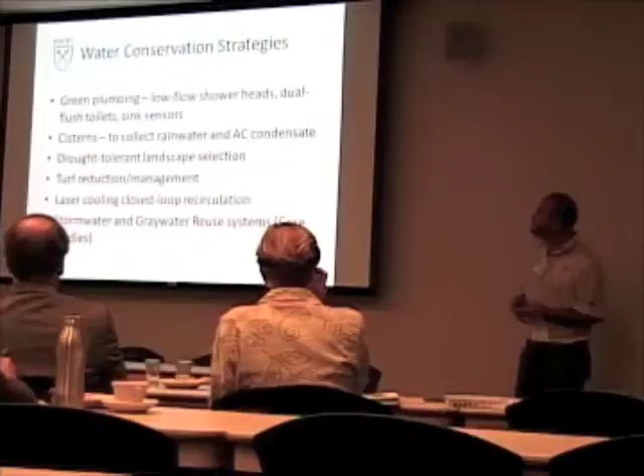So these are just some of the conservation strategies we employ - you've heard about so many of them. Green plumbing, as I like to call it, certainly part of our green buildings.

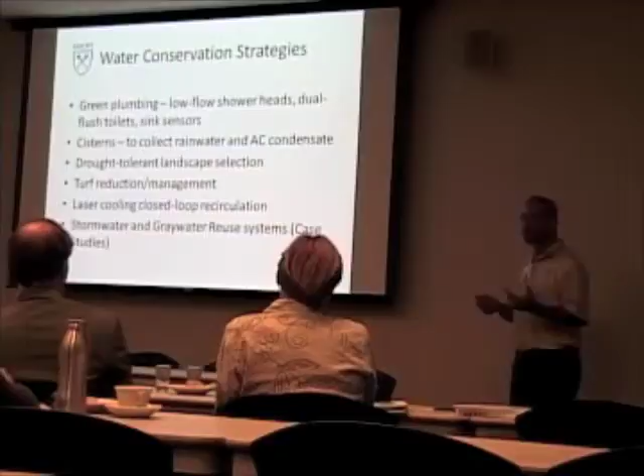At Emory, we currently have 16 LEED certified buildings, and I dare say in a week we might have 17. We've got 4 more in the works and about 3 in the planning stages. So we've definitely bought into the whole LEED concept and the green building program - that's a program I manage. I recently got my LEED professional accreditation, and I'm actually acting as the lead consultant on a new freshman residence hall project, just to try to save the university some consulting fees. So it's been a fun challenge as well.

But of course, all of the low flow fixtures, dual flush toilets, sink sensors and aerators.

With the cisterns, we're in a very similar situation as UGA. We have perhaps 9, maybe 10, traditional underground cisterns that, for various reasons, just aren't functioning at optimum ability, let's put it that way. Probably the biggest reason is during our design phase we tend to have too many cooks in the kitchen with our cisterns. A civil engineer will design the size and type of cistern, then pass it off, and it sits for a few months, then the electrical guy gets involved, then the mechanical guy, and by the time it's all said and done, our commissioning engineer at the end isn't really sure who's talking to who, and the whole system's not really fitting together. So that's been our biggest operational challenge with our cisterns, but we're trying to right that ship.

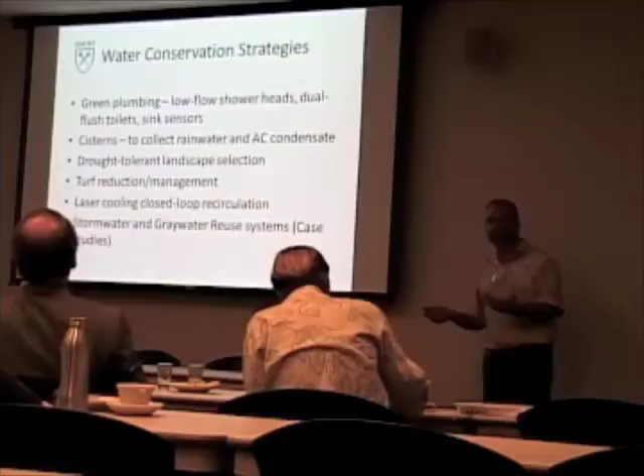Of course, all of the landscape management, turf reduction - we have a no net loss in tree canopy policy. We've established a tree bank: for every tree we take down on campus, we're required to either replace it or set money aside into a bank for future tree plantings. It doesn't necessarily have to be on the specific project, but elsewhere on campus.

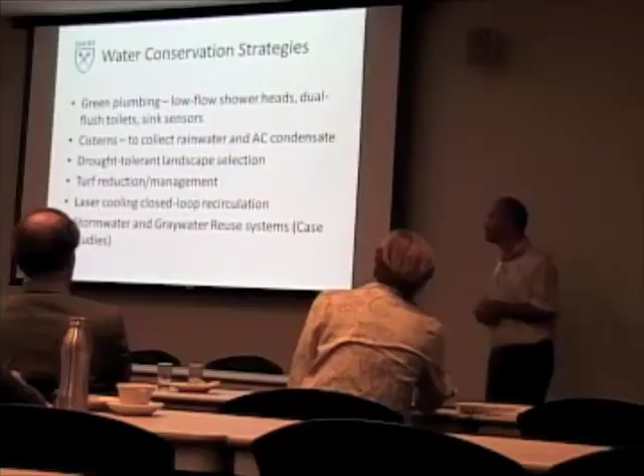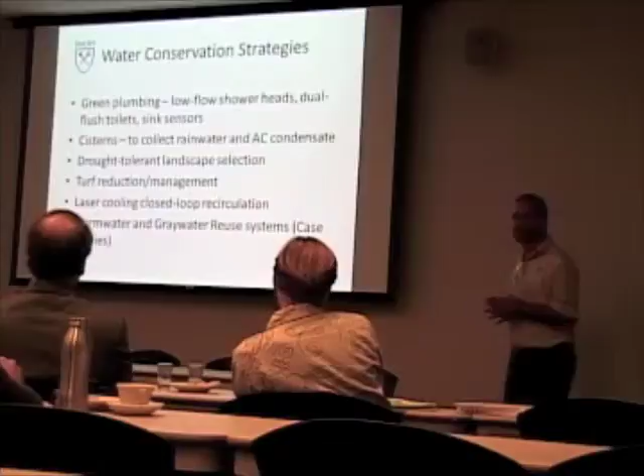Again, with laser cooling, the closed loop recirculation has saved us a lot of water. And then specifically what I'm going to talk about today are two stormwater and gray water reuse systems that we have recently incorporated into two new residence halls.

So, first of all, this is the Few and Evans Residence Hall. It was completed in 2008, 110,000 square feet, 293 beds. It is certified LEED Gold.

It is a sustainably themed residence hall, and students are actually required, during their application process, to submit an essay about what sustainability means to them, how they plan to further their commitment to sustainability, and how living in a sustainably themed dorm will affect their lives. The RAs and other student-led staff in the buildings run themed events surrounding sustainability, so we try to make it a fairly comprehensive culture for the students. The architect on this was Ayers Saint Gross.

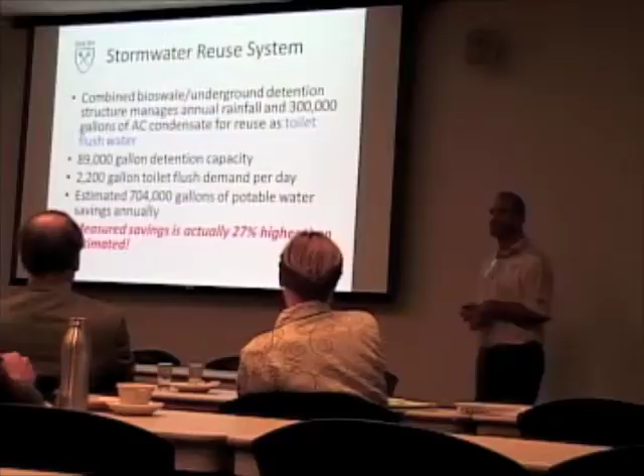So the stormwater reuse system, I'm going to describe it first, and then we'll go through some really telling photographs to help you understand it better. The system consists of a combined bioswale and underground detention structure. So basically it's like a cistern, but not a traditional cistern, meaning not a big box, not enclosed pipes.

The detention structure was designed to handle the annual rainfall amount, and it also collects about 300,000 gallons of condensate. We use the water for toilet flush. The detention capacity is 89,000 gallons, and we've calculated a 2,200 gallon demand per day. That totals up to an estimated 704,000 gallons of potable water savings per year. However, we are tracking this, and during the building's first 2 years, the average annual additional increase was 27% more than predicted, so we're very pleased about that.

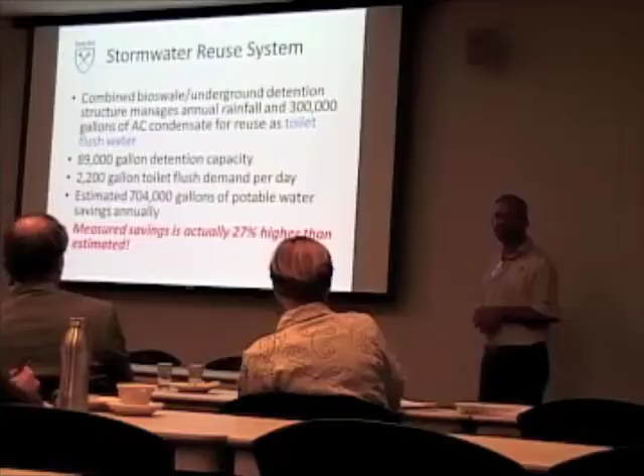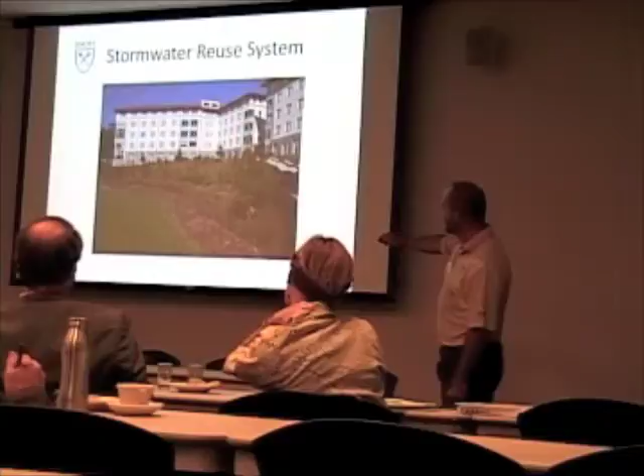So this is the system. You can see the new halls there - maybe a little difficult to see. The slope coming down from the top of the stairs, that's the bioswale right in there. The berm is the back of the bioswale, leading out onto a student athletic field.

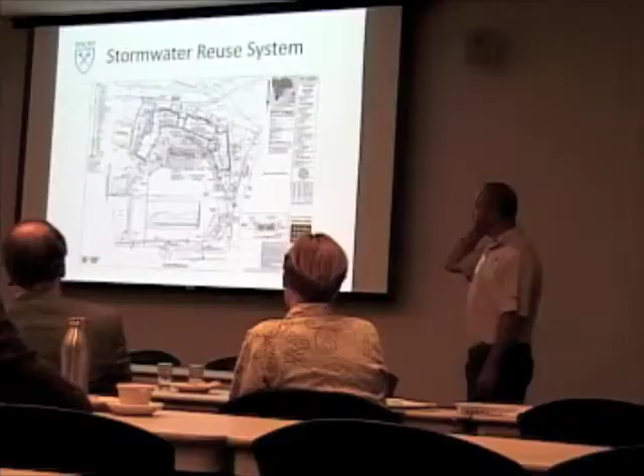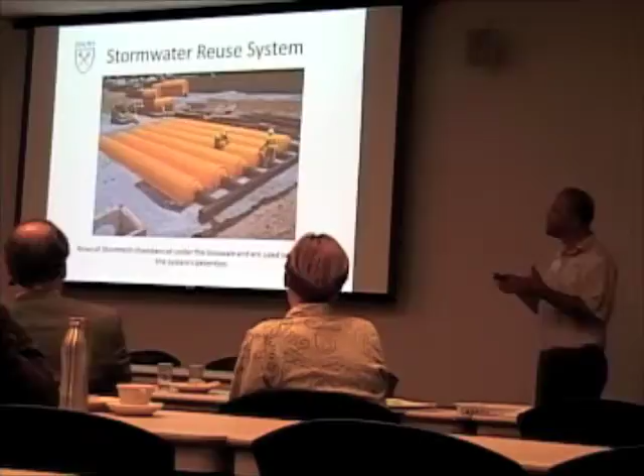These are what the storage structures look like - they're called StormTech chambers. If I go back a couple slides, those sit under the ground here, about 6 feet down underneath the surface that you see. It's a big system of chambers that sit in parallel, or manifolded together.

That's what the water flows into. It either percolates through the bioswale, through a specially engineered system of soils and plants that help filter and clean the water, or it directly runs off of the roofs and down through a direct inlet system through these manifolded pipes.

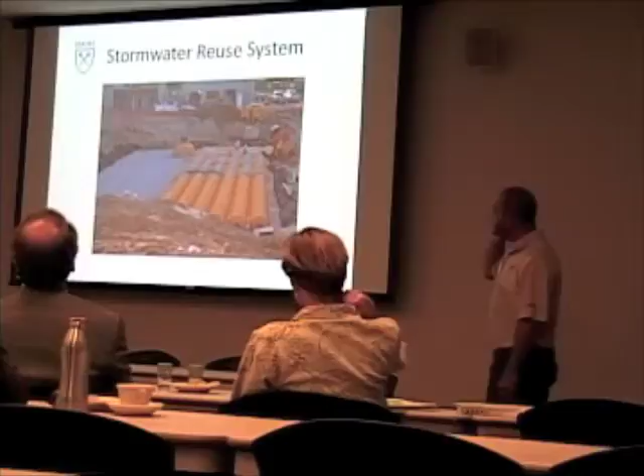Just more pictures of the install. They were set down on - you can see this black liner system, that's an MDPE, medium density polyethylene liner, on top of the gravel base, then the chambers, then more gravel on top, and then the constructed bioswale above that. You can see they're just covering them up, and that's basically what we have right now. This was taken maybe 6 months after the building was completed. Since then, the vegetation has filled in very nicely - it looks a lot better now.

That is an overflow structure that was designed for if we get any major rainfall events that would inundate the system and cause a backup situation. We don't want that, so we had to build in a system of overflows that would then take the water directly to the storm system.

Once everything is in those yellow chambers that you saw, and there is a demand in the building for toilet flush, we have a pump powered by these solar panels that moves the water from the storage chambers inside the building, where it goes through several filtration systems, and is ultimately stored in a smaller tank and then pumped up to the bathrooms within the hall.

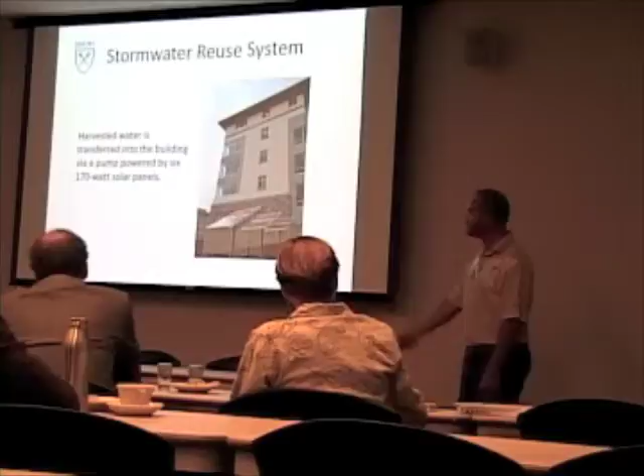Coincidentally, this to date is one of the very few solar arrays that Emory has on campus. We have not been successful with renewables, unfortunately. Emory is very fiscally conservative, I'll say, so our payback window is very, very small. While we realize there's certainly an invaluable price to education and public relations, our administration generally doesn't tend to fund anything with probably more than a 10-year payback. Generally, so far, we've found that most solar arrays do not provide that good of an ROI.

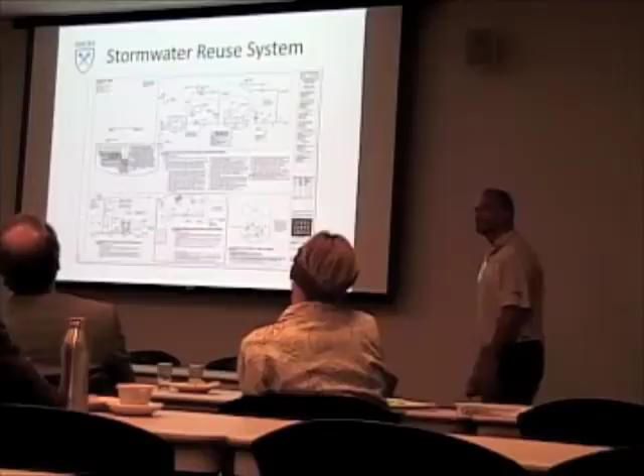So, anyway, this is way difficult to read, I understand - I just wanted to show you, this is a schematic. This came right out of the construction documents. This is the system. Basically it shows the pipe systems with the lift station there, bringing the water into the building, the filtration systems, the storage - a lot of very technical stuff that is above what we're talking about.

We've recently got funding to put them in 7 non-residential buildings as well, so we're going to be able to start having competitions among buildings and all kinds of really cool stuff that these monitors do. It sounds like we have the same system at Agnes Scott.

So it's a great educational tool.

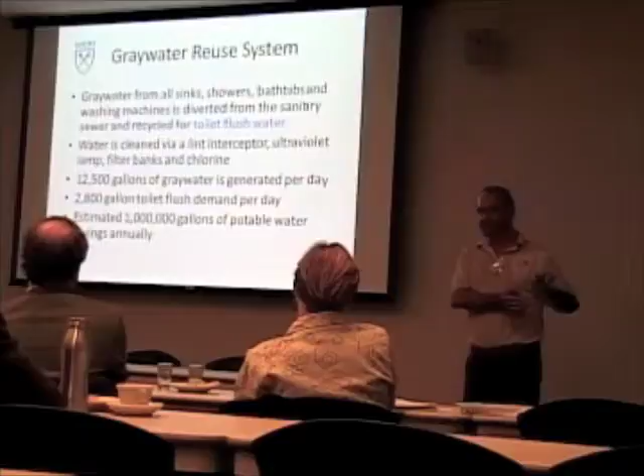For those of you who may not be familiar with gray water systems, you have your black water, which is purely sanitary sewer discharge. You've got relatively clean stormwater, and then something in between known as gray water. That's when you wash your hands after you go to the bathroom, shower water, water from washing machines, dishwashers, things like that.

In DeKalb County, where Emory is located, they were not familiar with the concept of gray water. So we had to do a lot of education with them, a lot of extra evaluation and presentation, basically, to get them to buy into allowing us to install a gray water system. But it all worked out.

I'll go through this real quick with you. As Kevin pointed out at UGA, we also had some operational issues with this, but we've pretty much gotten the bugs worked out of ours, and we feel it's working pretty well now. So would love to compare notes with other guys if that's appropriate.

Basically, all the gray water is diverted from those sources. It's taken down into the mechanical space in the basement of the building. It's put through a series of cleansing, which consists of a lint interceptor, ultraviolet lamp filtration to kill bacteria, some filter banks, and ultimately addition of chlorine. And on this system, the county required us to dye the water.

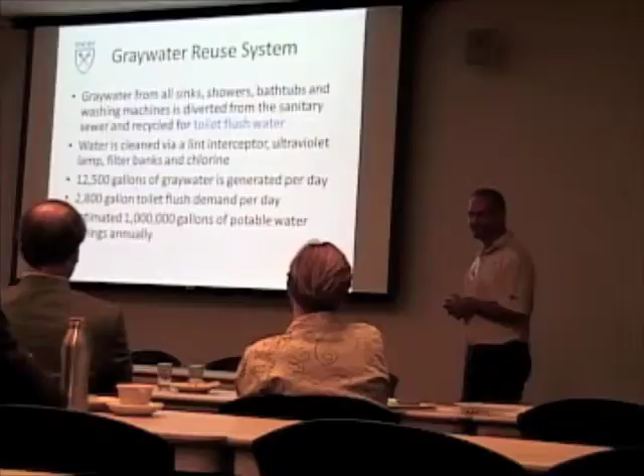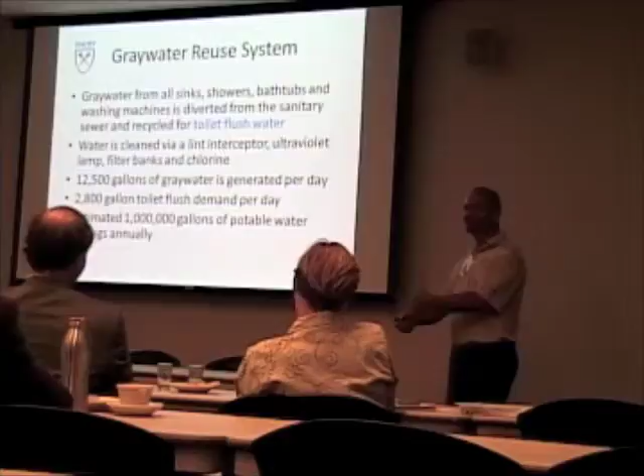Can you imagine why we would have to dye toilet water? Well, I don't know. It's just, as an engineer, counterintuitive to me. But these are students, perhaps. I don't know, not really against you guys, but I don't know who would stick their head in the toilet to get a drink. They made us dye the water to differentiate, to physically differentiate that water from the potable water. So anyway, that last step is to dye the water before it gets sent upstairs.

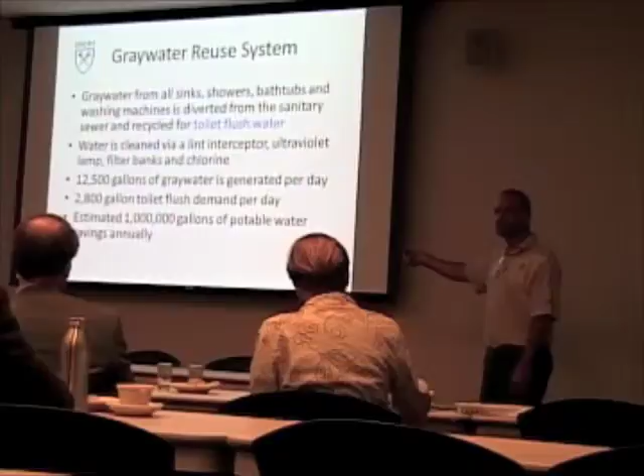We calculated roughly 12,500 gallons of gray water per day, 2,800 gallon demand via the toilets, and that's getting us roughly 1 million gallon savings of potable water. So this is not chump change. These are very good systems that were capital intensive, a lot of money up front, but the calculated payback, I'm sure is very good. And based on the stormwater reuse system in the other hall that I mentioned, we're seeing exceeded savings, so that's only going to make that payback even better.

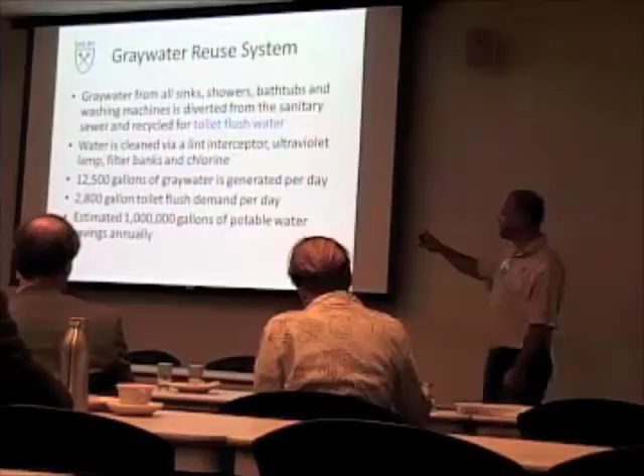This one I don't have hard performance numbers on yet, but I will in the future.

So this is what the system looks like. These are two of the holding tanks that the gray water initially flows into to start the filtering process. And then it continues through a series of things that I do not understand, but it's real pretty to look at. And believe it or not, even after a year, this mechanical space is still this clean. So shout out to you facilities guys.

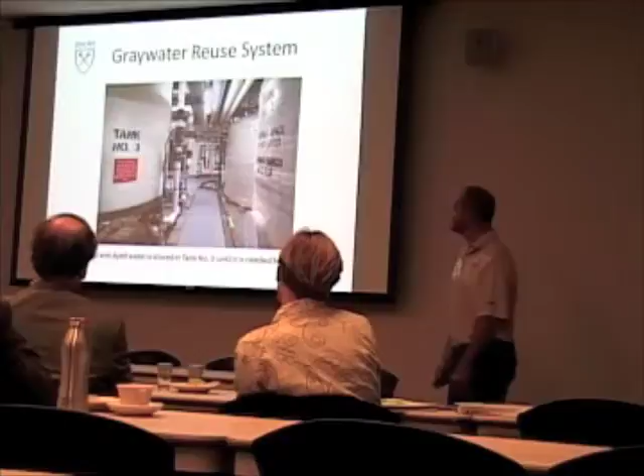So there, tank number 3, that's where the chlorine and dyed water goes. And after everything goes through the filtration, it goes into that tank where it's stored until the demand to be pumped upstairs. And there's the schematic for that one, which is even more confusing to me than the other one, but it's a pretty cool system.

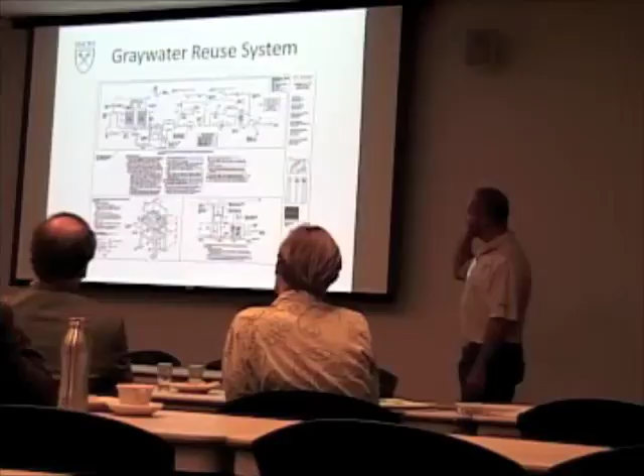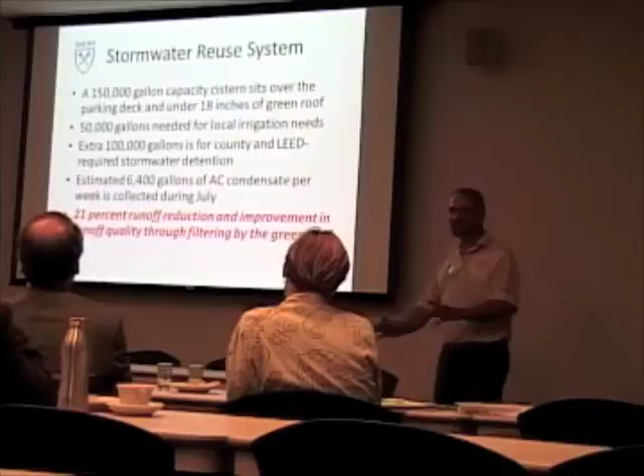So the stormwater reuse system at this site is a cistern, but as Kevin mentioned, at UGA and at Emory, most of our cisterns are underground, out of sight, out of mind. Like I said, they don't even work right, so it's like, why even talk about it? This one we like to talk about because this is an elevated cistern. It's a pretty cool concept. It sits over a parking deck and under a green roof.

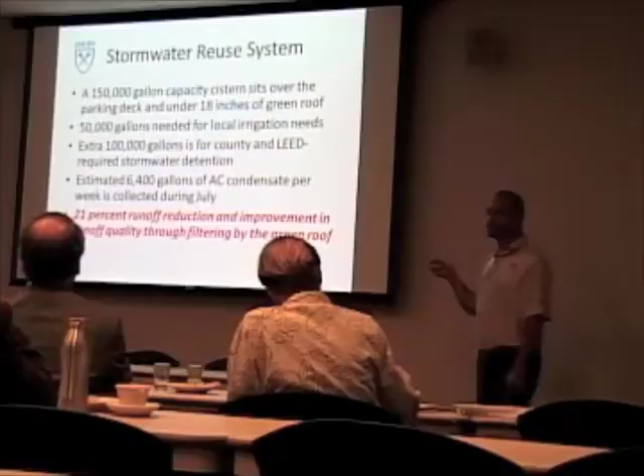So it's about a 3-foot thick system, and I'll describe it in more detail, that sits between the top of a parking deck and a green space outside of the new residence hall. We calculated roughly 50,000 gallons of water are needed for the site's local irrigation needs. We needed to provide an extra 100,000 gallons of storage capacity as per county code and for detention requirements required by LEED.

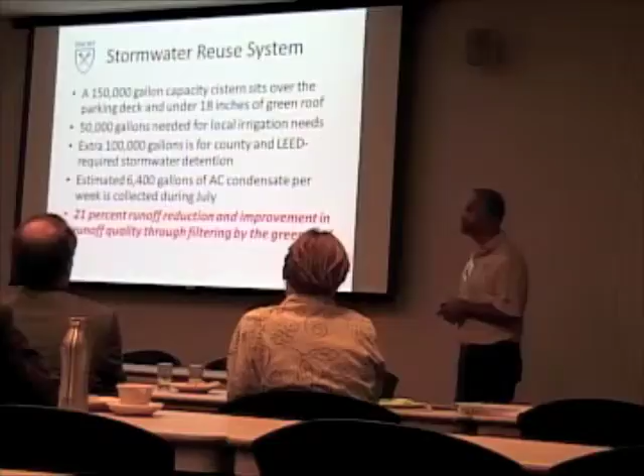And then there's also additional approximately 6,400 gallons of condensate per week going into the system during peak periods. For us, we calculated that in the month of July. So you can see, based on our calculations, we do have a 21% reduction in runoff. And because of filtration effects from the green roof, we have better water quality going into the municipal system.

What it consists of, roughly from the top going down, is about 18 inches of soil and turf on top, and then another 18 inches of the weirdest stuff - I can't even remember the technical product name, but it looks like old milk crates, a bunch of little milk crates stacked together almost like Legos. When you look at it, it has a honeycomb effect. It's this really hard plastic material that's not even as thick as a milk crate, because milk crates are pretty sturdy, you can jump on them. But this stuff has the structural integrity to support 18 inches of soil on top of it.

It's really called a rain tank - that's what it's called, a rain tank system. So it's a really fascinating product to me.

We are having some operational issues with it because it tends to clog pretty easily. The way the system was constructed, we do have filtration blankets and all that sort of stuff built in to help minimize those effects, but we haven't been able to pinpoint exactly where the stuff's coming in. So that's definitely something we're trying to work through.

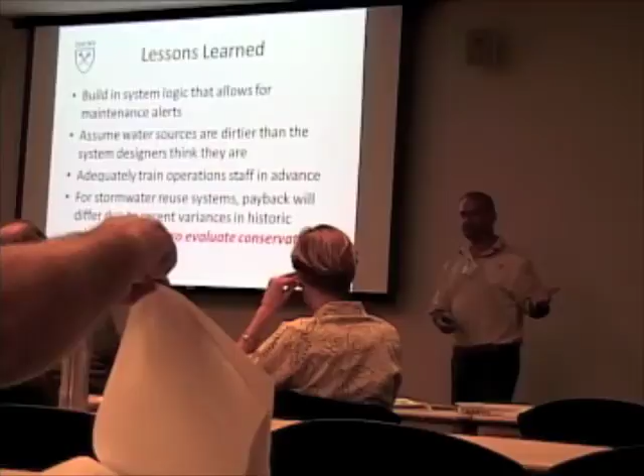Another big one we had, especially with the gray water system - assume the water is dirtier than the designers say it is. We worked with a couple different vendors in putting our system together, and they anticipated certain types of additional fluids coming down through the sinks, through the system. But our filters that they said would adequately keep up with those supposed amounts have not been able to at all. The water's been way dirtier than we were told it would be. So we had a lot of operational maintenance issues because of that.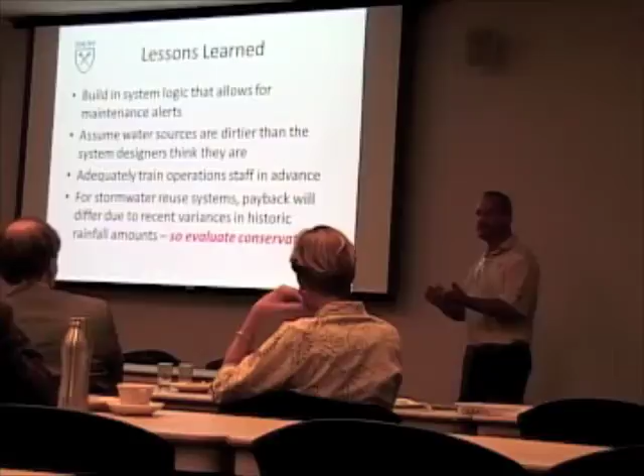These are, as someone else pointed out, very complicated systems. So always make sure to train your operations staff well in advance, and as Kevin said, get them involved during the design process. Get their buy-in so they feel ownership of it, and it's not just something being handed off to them while we in planning and construction go off to the next project. So always try to keep that in mind.

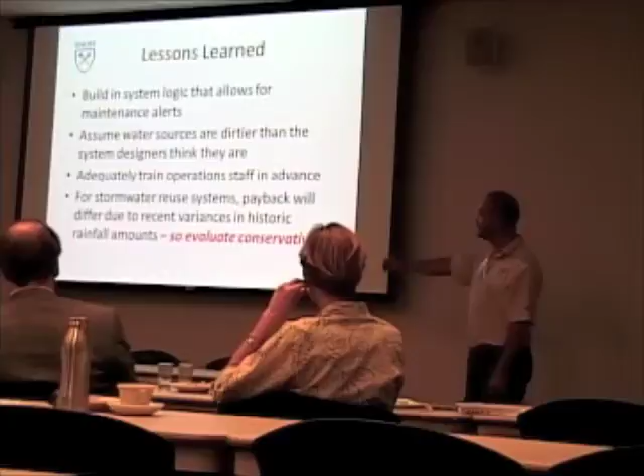This last bullet was really big for our stormwater, for any of our stormwater reuse systems. I talk a lot about payback, but that's really big at Emory, so it tends to get into a lot of our presentations.

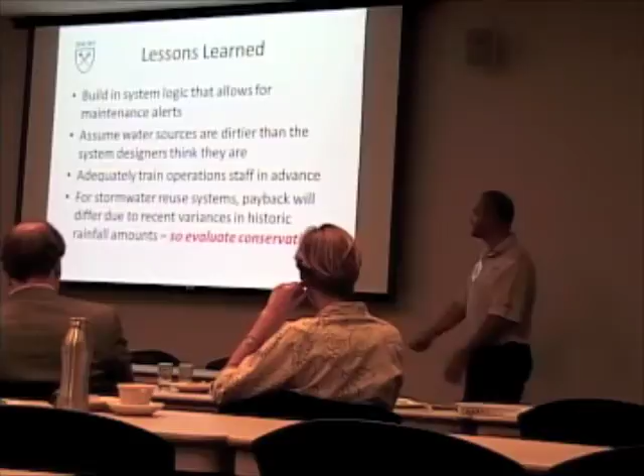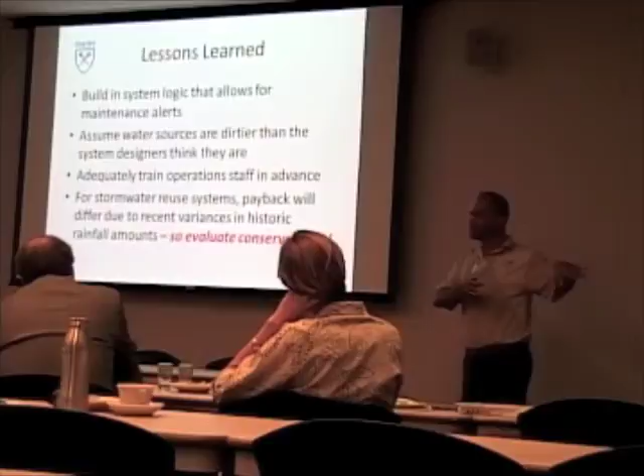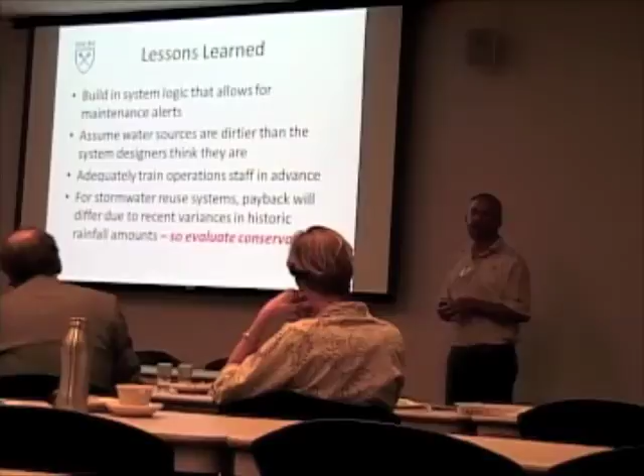Historically, stormwater systems are designed on known data accumulated through the years. Well, guess what - it's not raining like that now. So if you're hanging your hat on getting a certain amount of payback based on getting a certain amount of water into the system, right now is not the time to think that way. Be very conservative with your analysis. Use much lower anticipated rainfall amounts than perhaps required by county code, at least for your demand side of things.